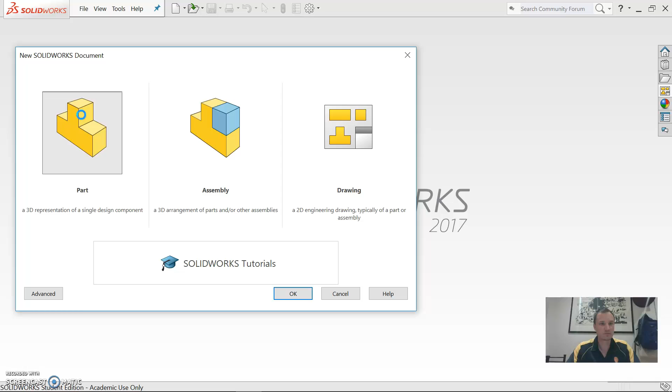Okay, on to 6.2, file new part. The first one, we need a pin that is 50 millimeters in diameter by 300 mil long. Sketch new.

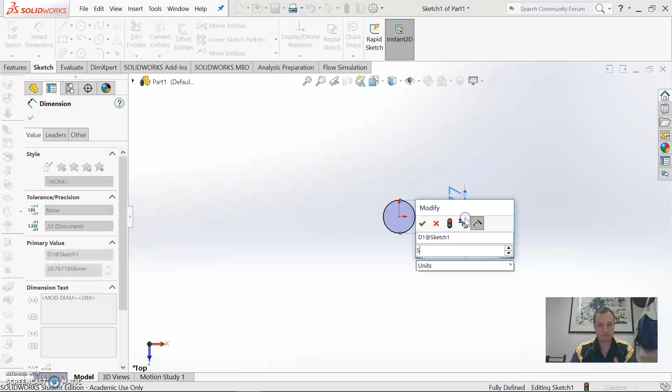50. Extrude 300. And material is titanium.

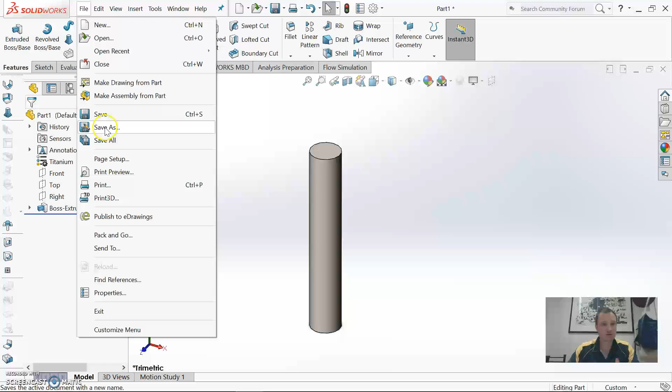Okay, save as, what do we call that? Pin 1, long pin.

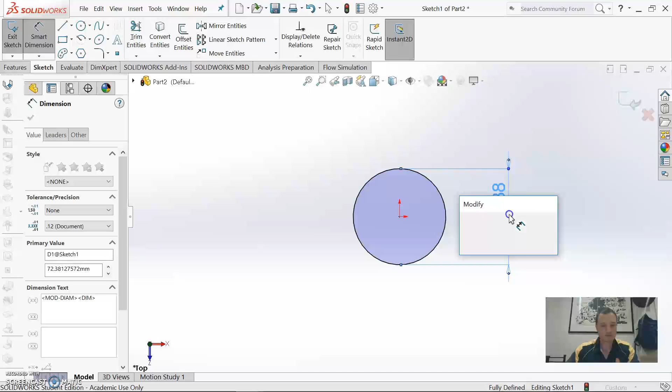File new part. Sketch. This time we have a pin that is 100 mil. Again, made out of titanium.

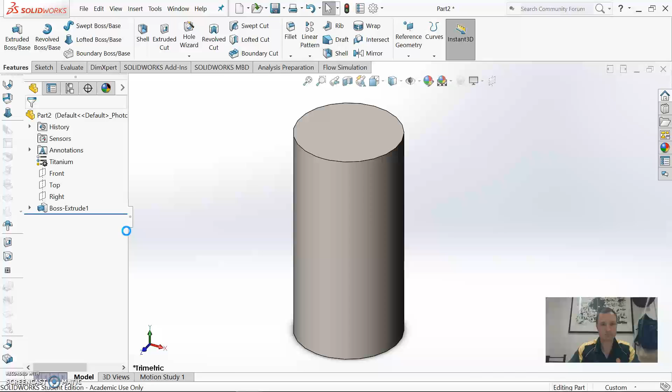File, save as, short pin. New part. This one is the chain link.

Alright, so this time, let's go ahead and make block. So this is 100 mil by, how far out are we?

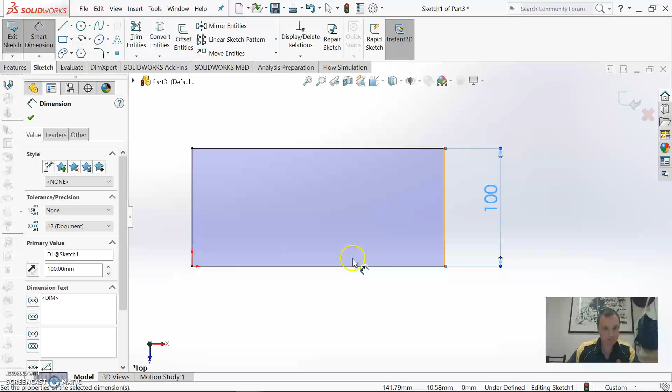250. Is that right? 200 plus 50. This is 100. Okay.

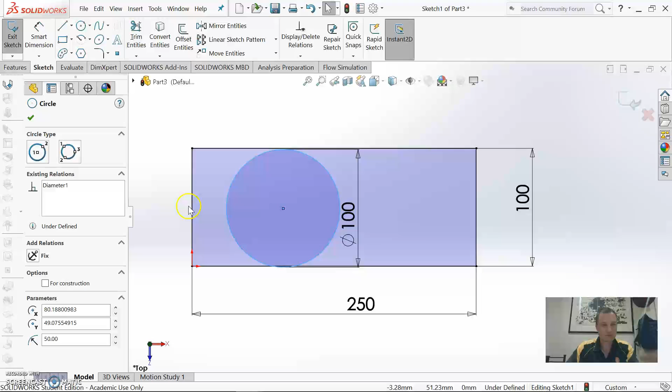Select this edge, shift and this edge, and make them tangents. This edge and the top edge and tangents. And that should make these bottom ones tangents too. Yes, good. Trim entities.

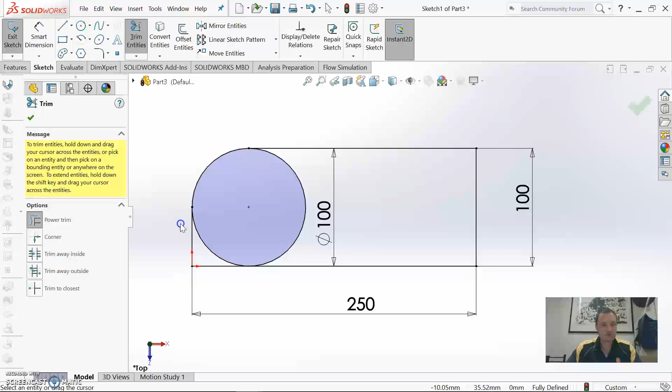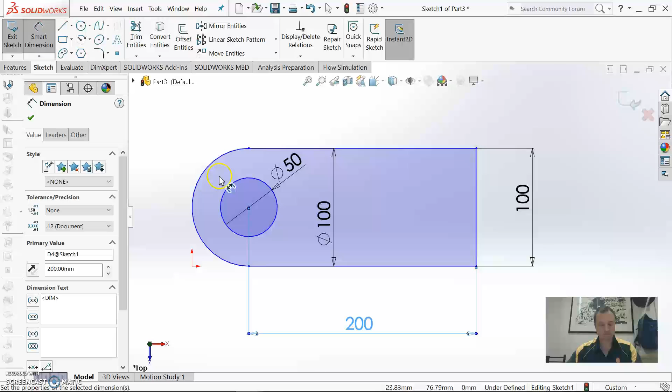We've got another one in the middle here that is 50. We've got 50 there. Oh, let's get this dimension back on. It's 200. And let's select the center of this circle, hold down shift and select the origin, and go coincident just to lock it back in.

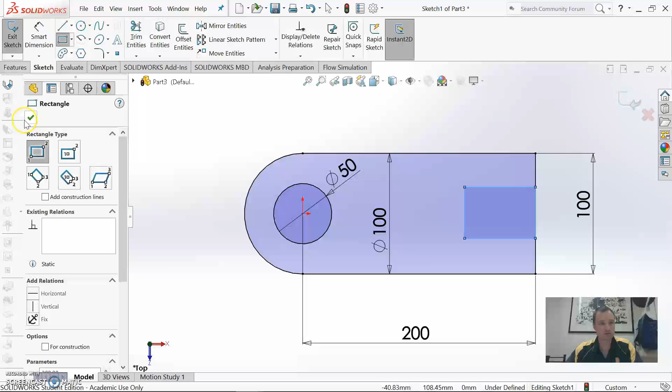And we will take our slot out here. So that is 30 and 40. 30, 40. And that is 50 mil in.

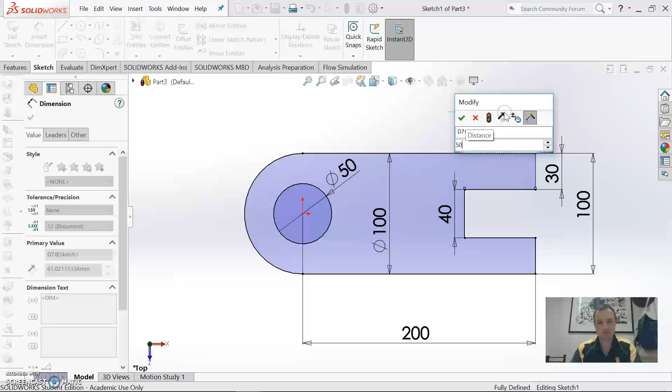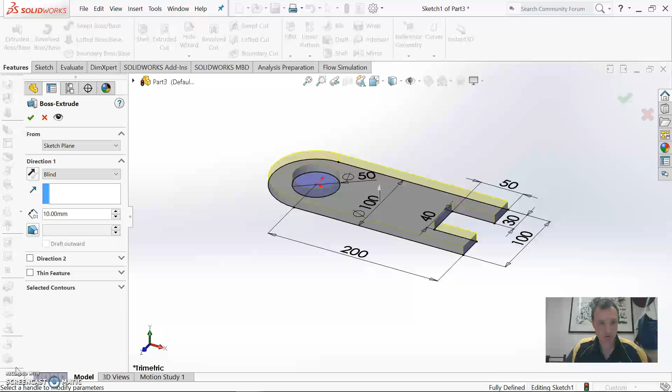Okay, let's go ahead and extrude that to a depth of, where is it? How deep is it? Okay, that's by 100. Okay.

Let's just go back in here and edit this sketch, because that's not 50, that's 100. Up here, rebuild tool, and we'll turn our shape back into our shape.

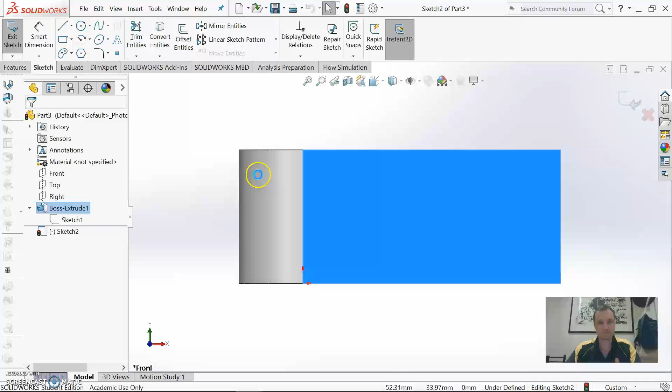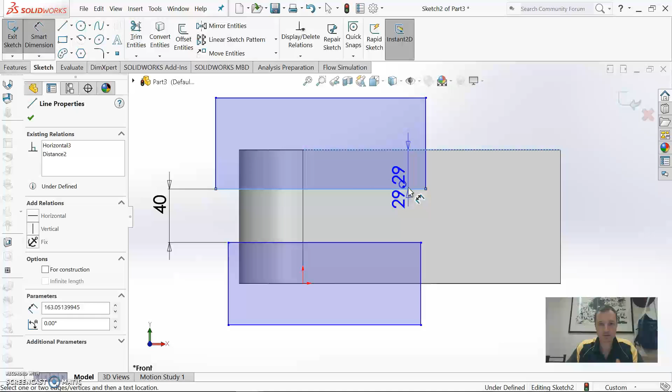Alright, so right click on the side face, sketch, recenter our drawing, and let's draw two rectangles that are 40 millimeters apart, and that are 30 millimeters from there, and that are 100 deep.

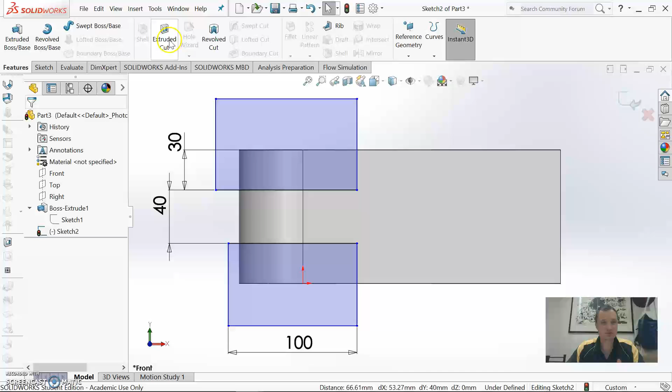And if we click on that point, shift and this point, and go vertical, it will lock them in. And then we can go features, extrude cut, through all, and that will give us our first bit.

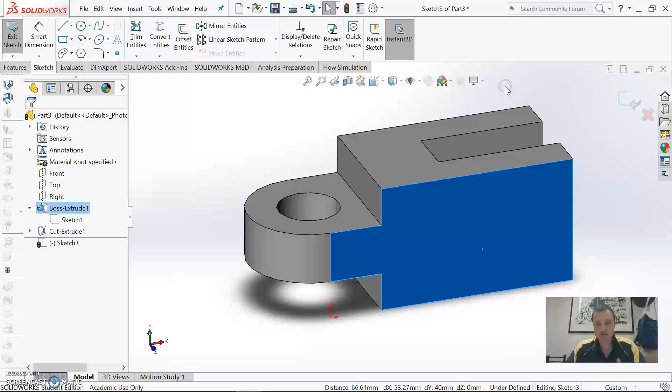Right, next one, right click and sketch, recenter, and this back into 100 mil.

And the same as we did before, we're going to tangent it to these edges. Tangent, tangent, trim entities, oops, Control Z.

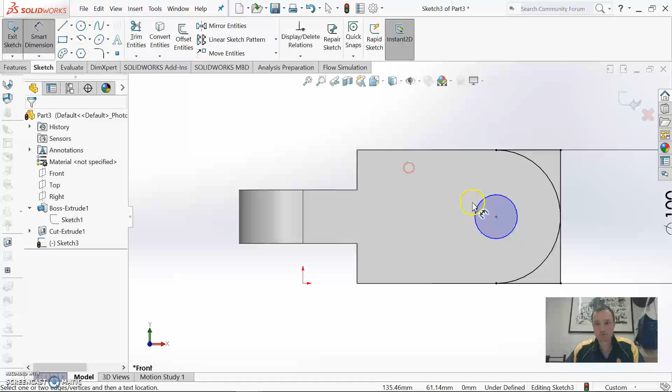Let's put that in a box. Okay, now trim entities. That will cut that section out and put our 50 mil in the middle.

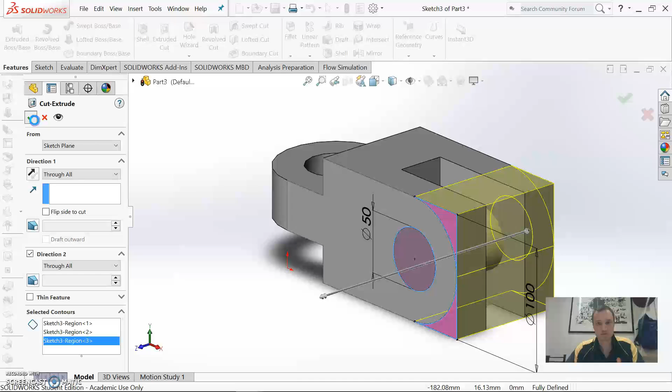Features, extrude cut. Don't forget to select these parts as well. Oops, through all. Okay.

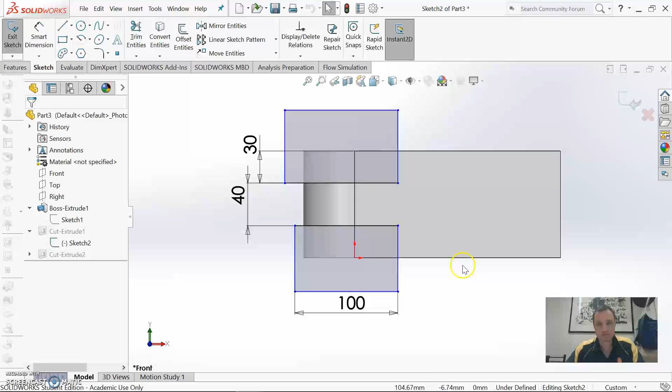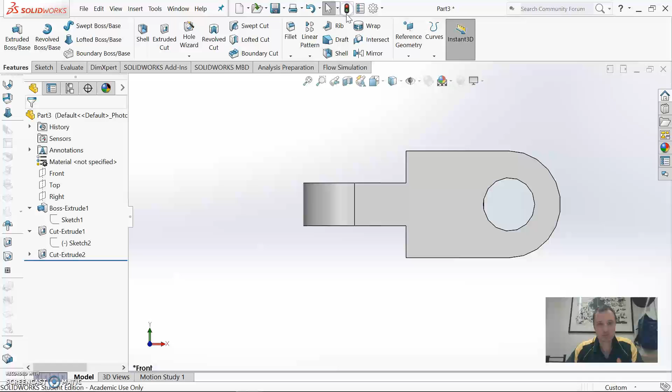Okay, let's just make that one match that one. Again, rebuild. Still doesn't look long enough.

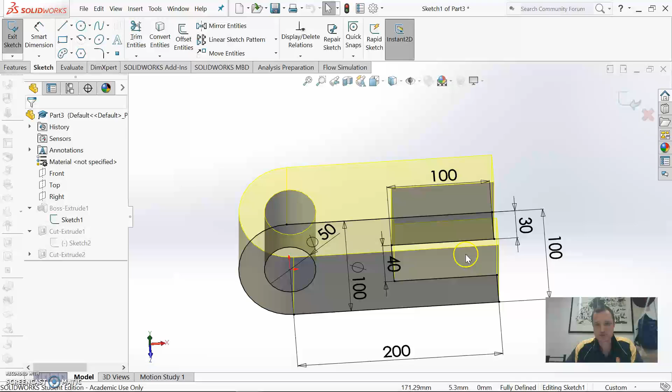Okay, I figured out what it was. This here, if we go back into this sketch, we've said 200 from center to edge. It's center to center, so that's actually 250.

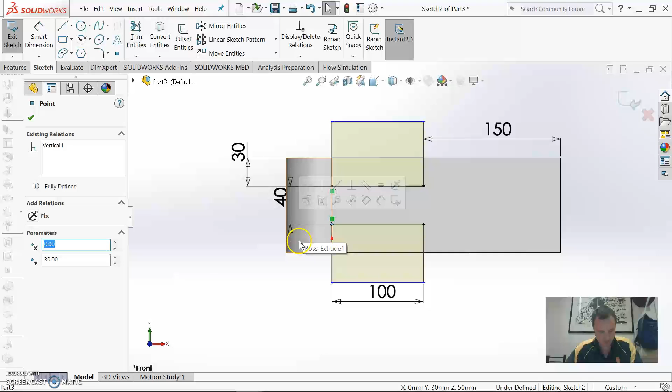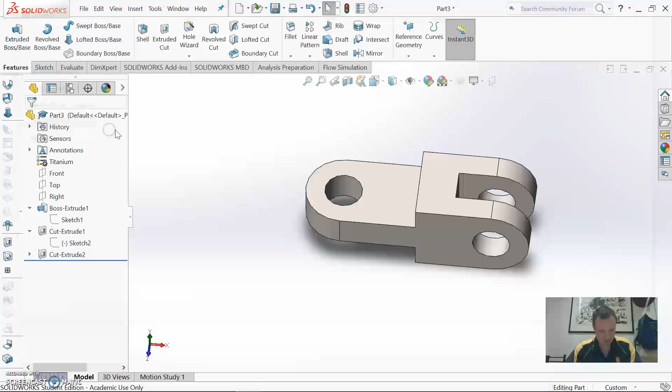That looks better. And that is made out of titanium also. So right click, edit material, other metals, titanium, apply. File, save as, and that is, let's call it chain link.